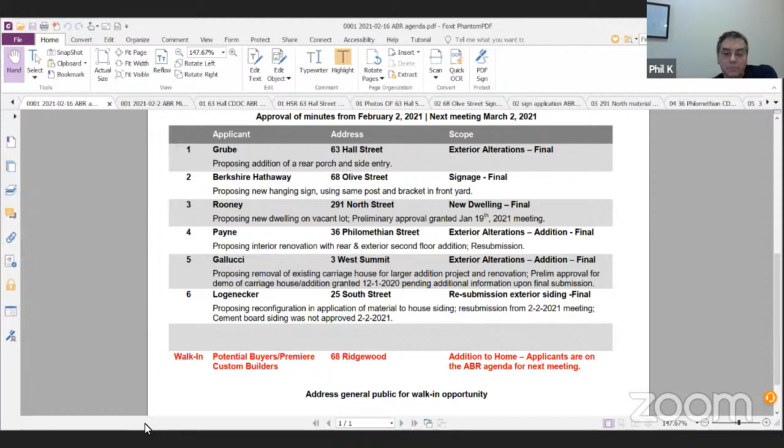No, no. Time-wise, are we good? We good. I declare this meeting... you're ready. Are we ready?

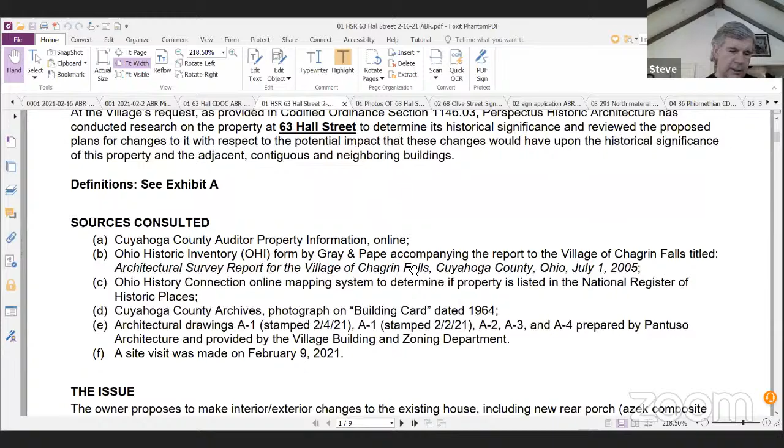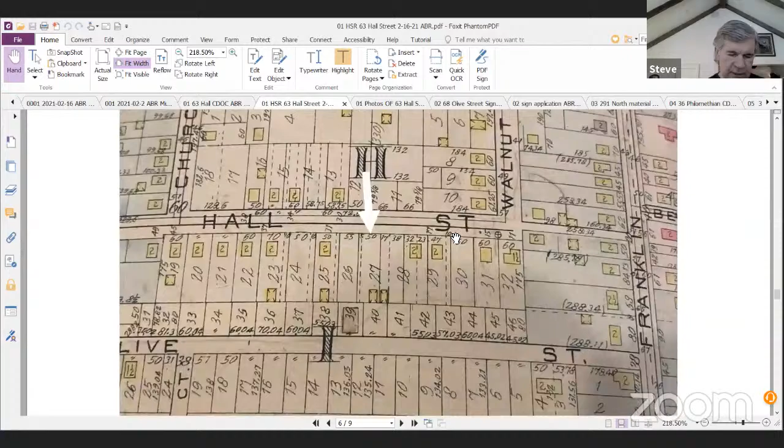I'm a little puzzled by their finding of it not being historically significant, because it's pretty much intact and it's a cute house for its time, but does not meet certain national guidelines evidently, and so it was deemed by Perspectus to not be historically significant.

So I fall with you that I do think this house is historically significant. It's 99 years old. I just think it's really strange to have these called non-historic based on a technicality. I think there could be a little discussion had about houses between 50 and 100 years old and how they fall into this -- especially if they're relatively unscathed in terms of additions over the years.

Anyways, nonetheless, we will accept their thoughts. I move to receive the report. Second. Sorry, Wendy, you got beat on that. No, that's okay. So motion by King, seconded by Childs. Naylor, yes. King, yes. Childs, yes. Okay, motion's approved for the HSR.

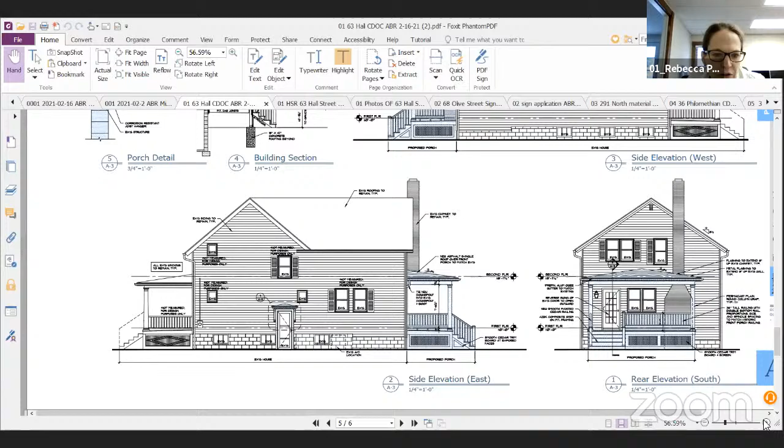I would agree with the board, it is a lovely historic home and should be on the registry. We're in fact trying to all but replicate the front porch to match in the back, doing a somewhat modest covered area. They've got a big -- if you look at the photos of the existing -- a poorly constructed deck.

The risers come up taller than the treads, so it's leaking water down in between and it's kind of a mess. We're going to tear all that out, which is great. In adding this back porch, not only will they have a little covered area, but I think it'll provide relief -- as soon as you walk in that door, you've got a mud room that's just the corner of the rear living room.

So not throwing Aaron, Curtis, and the 3 kids in the door out of the rain might be a little bit helpful functionally in daily life. But yeah, our presentation is such that we really want to match that front porch, so if you like that, you'll like this.

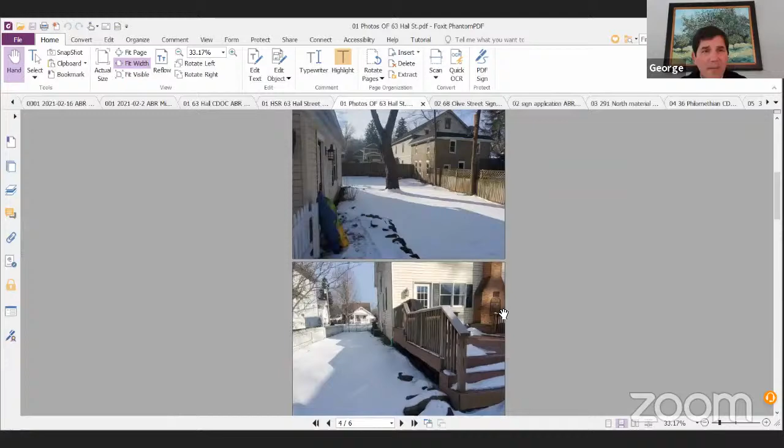I think there's nothing at all objectionable about that -- the rear porch concept, I'm all for it. I just had a couple of comments. This distance from here to here is over 18 feet, and really the study of intercolumnation -- if you look at the front porch, the columns are probably within 6 to 7 feet. There really should be some sort of column either here or here, because this looks like the span is too far and needs some other type of column.

Again, that's basic intercolumnation of spacing a column. So that would be -- I think the porch is fine the way it's laid out, the hip roof and everything, but I would highly recommend a column in some area. The other thing I think is on the hood, if you go to that hood detail.

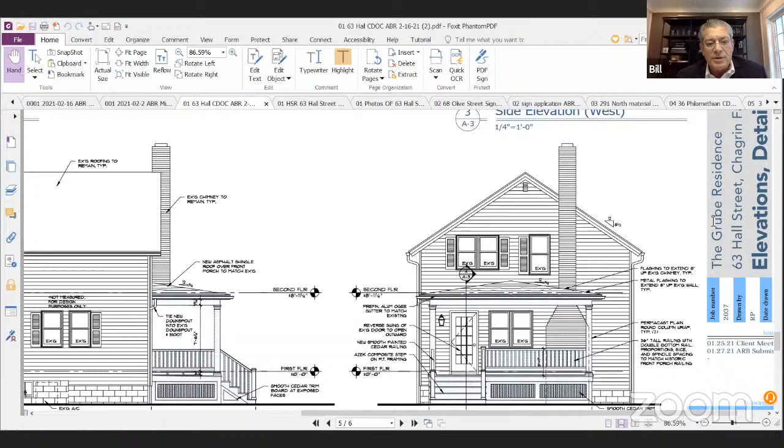Stop -- how about the side entrance, Bill? No, go back up, sorry. Well, you missed it, a little bit farther down. So I think this hood's nice and everything, but the bracket really needs to come out to here -- it really should be here. So it looks like when the beam goes around and returns, it has to hold up the corner instead of being cantilevered.

But those are the only comments. Other than that, I think it's fine.

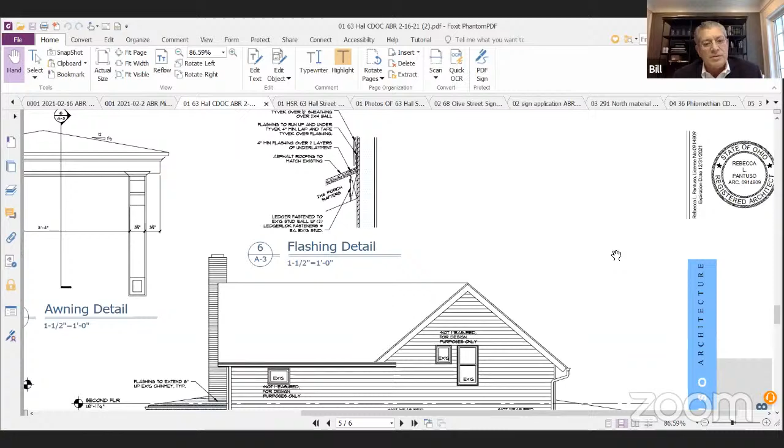Thank you. Anybody else? Does that arrangement match the front? The cantilever idea? No, it's going to cantilever out past the bracket, and I'm trying to keep that kind of modest in detail, because it's going to overhang the bracket in the front.

I've seen a lot of little bracketed, very small things that do not have the beam element. You're really bracketing to the under surface of that, and I think that's what this is. So then a projection on the side might be appropriate, Bill, if it's that modest little overhang without the beam, and you're really just holding up this little roof with the brackets. Yeah, I agree.

Motion? I move to approve plans as presented with the addition of additional columns and attention. I think if you're going to add a column, I like the idea of accentuating the entrance with one column added instead of two, but I think we should leave it up to Becky and her client to figure that out. We've got a great porch, it's a nice solution.

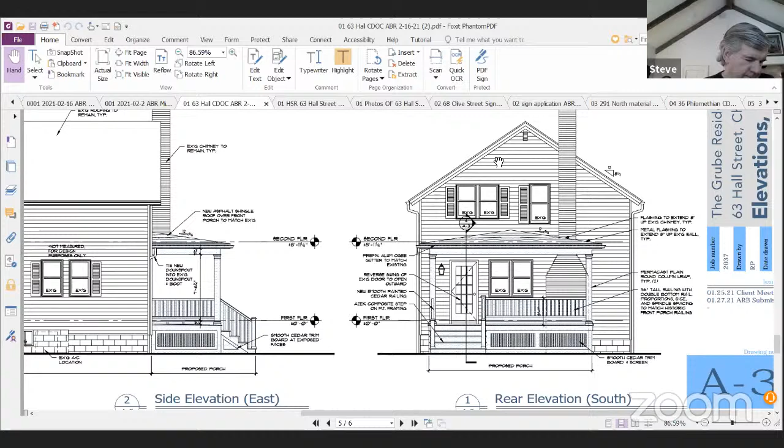68 Olive Street, Berkshire Hathaway, hanging sign. I think we could probably move to approve this. Yeah, this is basically just a rebranding of what was there. Okay.

I agree. Motion to approve as presented. Second it. Okay, moved by King, seconded by Childs. King, yes. Naylor, yes. Childs, yes. Okay, that was easy.

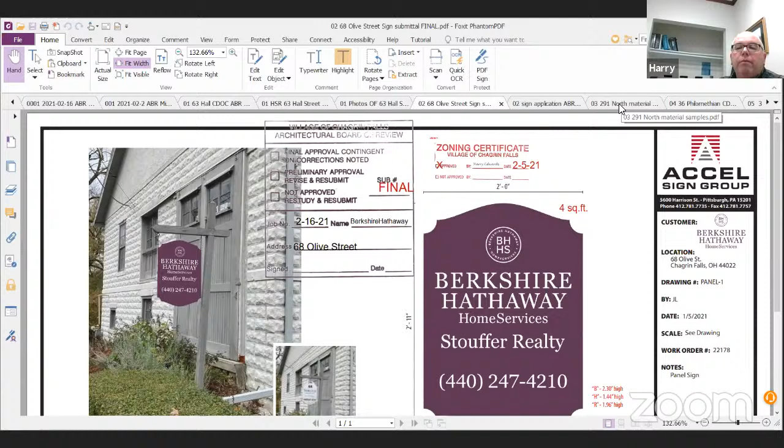Moving on to 291 North Street. Maybe.

I might have lost the file, I've got so many tabs here. Oh, there it is, I see it. Oh no, that's the material— that's the materials. Yeah, I'll have to go back in and get it. Please hold.

You see that? Oh, nope, nope. To you. Yeah, thanks. Now we see Bill. Morning. Hold on a second. Morning. Hey, Christy, I might need your help here for a second. On my way, thanks.

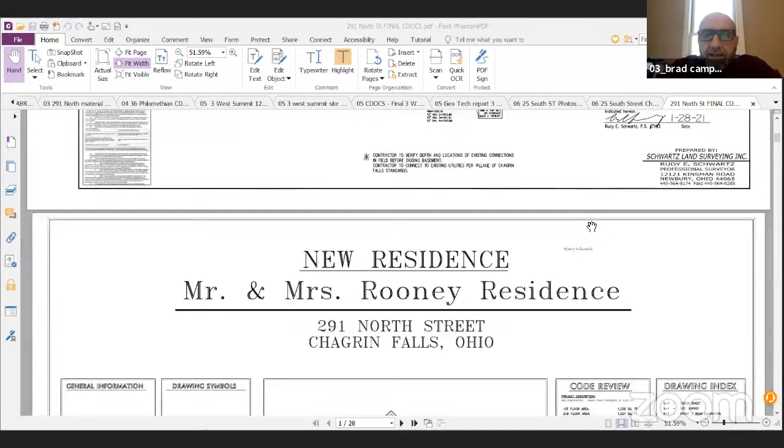You guys, excuse me, you guys see that now? Yes, thank you. Okay, sorry about that. Thanks, Christy. So I don't know, Kevin wasn't feeling all that well yesterday, so I'm assuming he won't be joining us this morning.

We switched to the Hardie board per the board's request. We're going to use the Hardie board with the MiraTEC trim. If you go back to the front elevation for a second, the one thing we're hoping to put back in is we really like that arch. I'm just going over the things you asked us to change since our last meeting. We really like that arch transom over the front entry and that little ski slope arched roof on the right-hand side. Those are two things we are hoping you guys would accept.

Sorry, go ahead. I think those two elements do complement each other formally. I mean, they give a little softness to it.

I'm not positive about correctness, but I don't know that this is a completely correct design in any event. It seems like how you've handled the roof, and I agree - I love the sloped roof. I was sad to see it go, and I'm glad to see it back, because I really think it adds some softness, like George said.

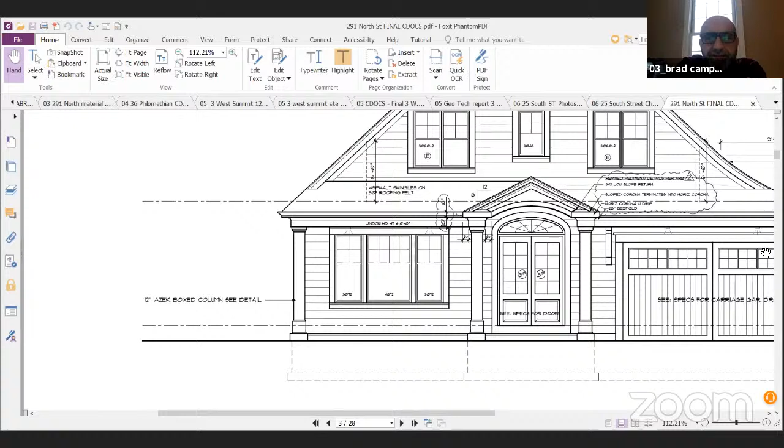On the left side elevation, you had asked us to either pull the foundation out or pull it in. Oh, I'm sorry, let me see if I can pin Phil here. Harry, could we zoom out again? I do think one nice thing about this front is that you've got the overhang of that little porch on the left side to create shadow.

Where do you want me to go? The left side elevation?

We had a dog shed, direct vent fireplace, and the board recommended either pulling that fireplace into the great room or pulling it out. In order to afford the Hardie board siding and stuff, we opted to pull it in so we didn't incur the additional foundation and stone cost. I think that's fine.

Brad, not to interrupt, but on page 167 is your exact porch except with the elliptical. Look at the left side of that page, it'll show you how to do that. 167, okay perfect, thanks for that. Those details are the best because they don't cost any more money or any less, and they just make everything better, you know? Right, correct.

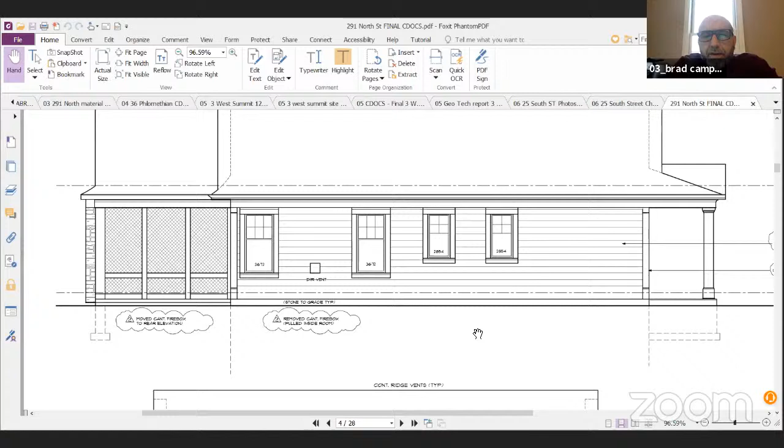Now Brad, I did get comments back from our plan reviewer. You're gonna have to resubmit new plans to me. Also, I think you were copied on the site plan - our engineer needs you doing a revise and resubmit. Yeah, that wasn't approved yet. We'll make those corrections.

Sounds good. I was thinking we could buy Harry a copy of that book - I got one on my shelf back here - and save $45 twice a month.

You don't need to buy me one, it's right here. I have one too. I do too, and I use it all the time. It's funny, I do too, when you're trying to explain things. It's very helpful.

Are we ready for a motion, Steve, for final? Yes. Okay, motion for final approval with attention to porch column, capital, and architrave, and entry arch, following pages 157 and 167 of Get Your House Right book for guidance.

Did you get that, Joan? Yes, okay.

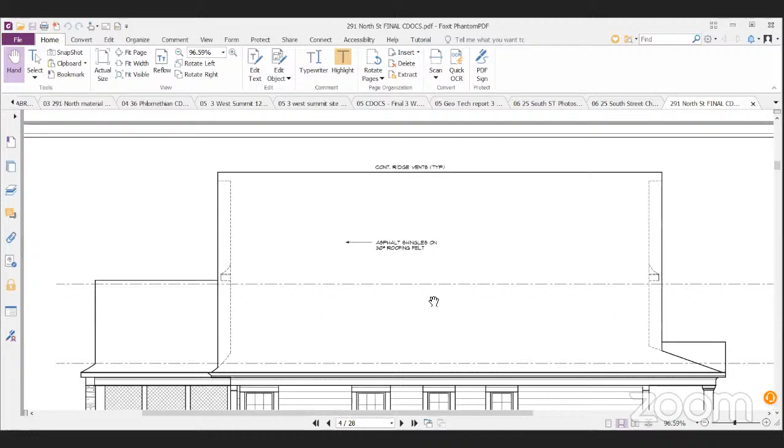Just one more comment - if when you're doing this, just so we understand it, you also see that happen on the right and left side elevations where the front porch architrave comes around.

Brad? Yeah, I was actually going to change the plans, and I would really appreciate the approval obviously, but I was just going to resubmit the detail just to make sure we get it right, frankly. I'll have Kevin make the changes, and maybe I could just take like 30 seconds of the board's time at the next meeting just to be like, yeah, you got it, Brad.

Great, yep, we're happy to do that. Yeah, I just want to make sure I can look at these pages, have Kevin make the changes, but it takes 30 seconds to make sure we get this thing as proper as we can.

I think you've done a great job. I feel like there will be a future addition that will improve this house, which will be a shed dormer on like a third or two-thirds of the side elevation - something to pop out there. I don't think we can force that.

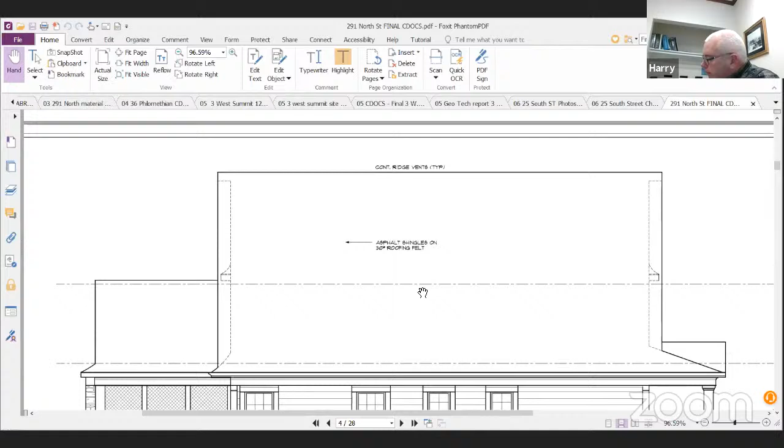Okay, we got a motion, need a second. Second. Motion by Naylor, seconded by King, for final approval pending grade plan review and plan review. Naylor, yes. Childs, yes. King, yes.

Christy, my wife just got a phone call - somebody's trying to get on the meeting. There's nothing special, how do you watch the meeting? You just dial in. Sure.

Can I ask one more question? I just want to have you guys look at that front elevation - should I fill out a whole other application, or just at the end when you have the public hearing, just show you the detail I did? That would be fine.

Right Harry? Yeah, that's okay. He's just gonna come back and show you what he did. Okay, pretty informal.

All right, I got 5 kids at home, so I remember when snow days were fun. Now I wish.

Have fun, Brad. Bye. Thank you, bye. Go sledding.

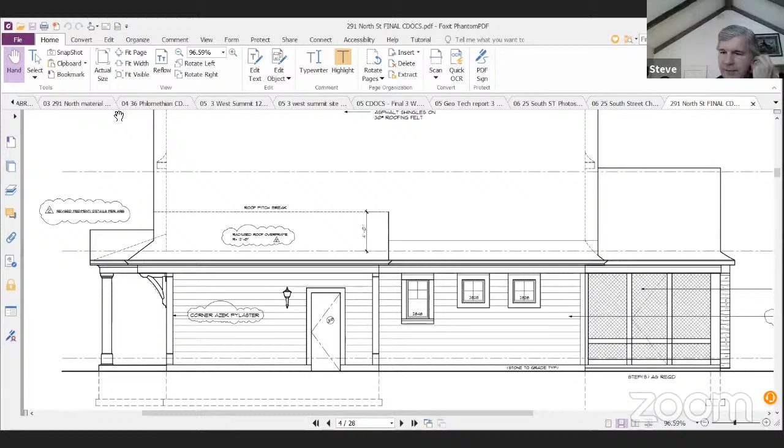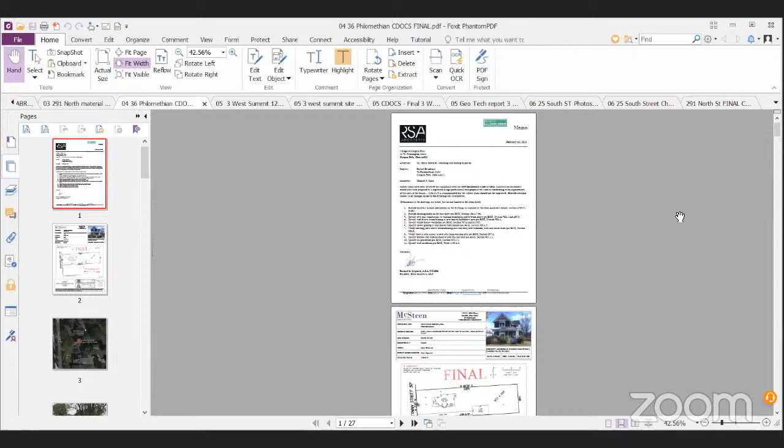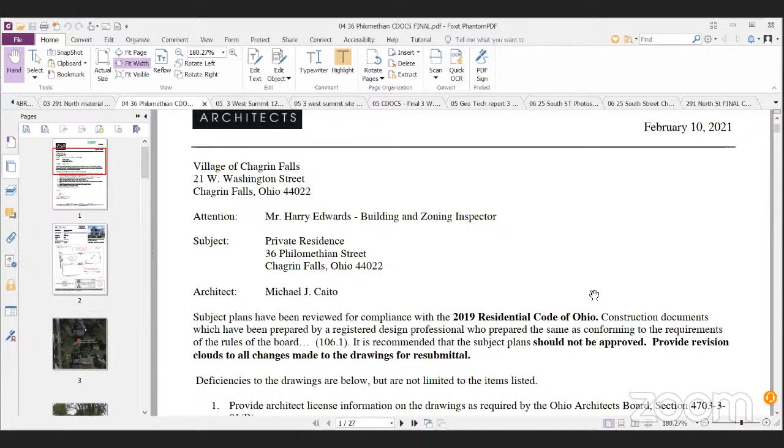How does somebody get on the meeting to watch it? If an attendee would like to join, they should go to chagrin-falls.org and go to the virtual meetings page, where there's a link to join. When they select that link, they'll be prompted for the password listed on the website, which is 44022. I will see them as an attendee in the Zoom platform. So, go to the website, go to the virtual meetings page, and click the link for this meeting. Three steps.

Okay, 36 Philomethian, an old friend.

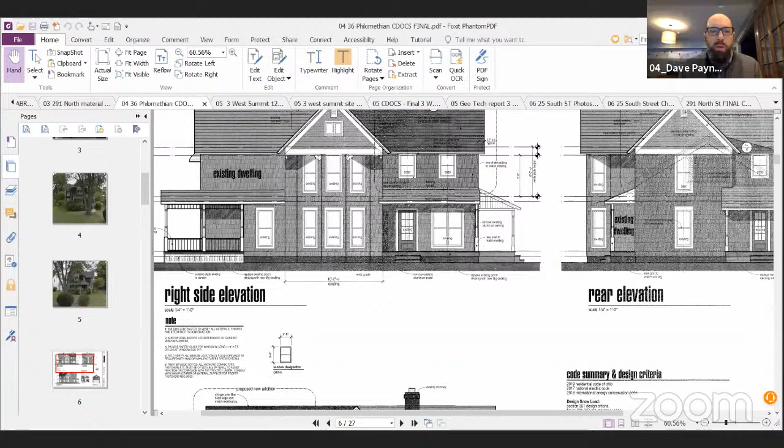So thanks for having me back this morning. This is our final submission for 36 Philomethian. Previously we submitted for preliminary. In that prior preliminary submission, we showed the new rear elevation concept reflecting the reverse gable and the asymmetry. Some notes from that submission were to lower the pitch of the roof slope of the hip element on the right side of the rear elevation, and to add a window above the door on the rear elevation. We did that, and then we were asked to study further, and we actually presented two different looks.

So not to confuse you, but you have multiple choice this morning. We wanted to study how this looked on the left side elevation, and it was requested that we draw the left side elevation in full. So we drew it two ways. One is essentially that this addition is flush with the existing side of the elevation. The other way we drew it, if you could scroll down, was with a step in the left side. Let's see, where'd that go? There it is — this is the alternate that was drawn.

We were asked to study working off of the rear porch roof and integrating the detail into that to provide some sort of visual break, stepping it to create the L shape of the left side elevation. Lastly, we're adding a new garage door to the barn. The barn door in the rendering reflects the selection we've made, and we are no longer centering the hayloft doors above.

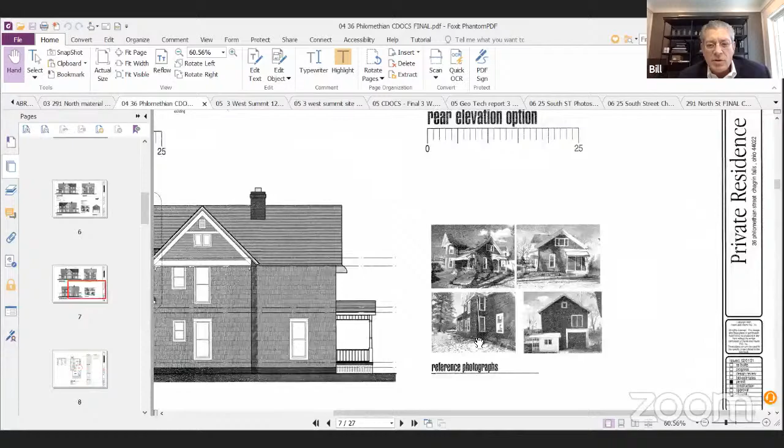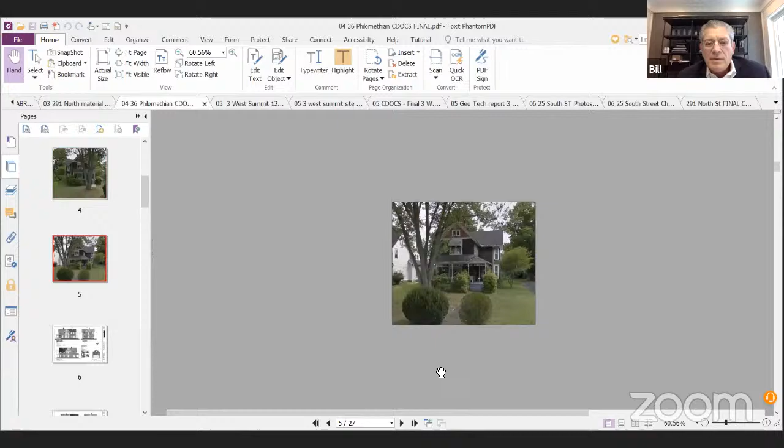So could we see the rear elevation of the other solution? Like, that was this one, correct? And then you have the flush solution. Go back up, Gary. There you go. Is there a rear elevation of the other solution? Yes, it's on the same page for each one of them. Shrink it down a little bit. Option, and then the—

So I would maybe defer to you guys on this, because I'm starting to feel like you're right about that side elevation. I know I was pushing for the step in.

I'm a little troubled by this super low hip roof there — it seems anomalous. In some weird way, I think they'd get more headroom if it was a sideways-facing shed that went up closer to the ridge. I don't think there's a lot of headroom in those rooms, and matching the eave actually seems a little forced to me. I feel like we've tried to push it down and make it so inconspicuous that it may look a little unnatural once built. I could go either way on the shed versus hip.

You're talking about the little shed over the master bath and closet. Yeah, that's the one. That's the trickiest part of this thing.

Can I see the rear elevation again with the flush alternative? Move it over a little bit. So it's up. Yeah, that's the inset one.

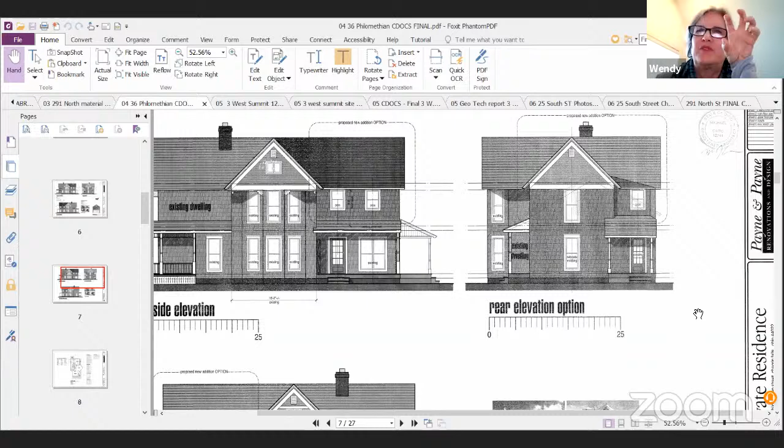So I was thinking, well, maybe I guess you could do it. You could make it kind of an L. I see what you're talking about. It's this little kind of thing stuck in the corner that isn't a shape that goes with the Queen Anne.

If it was just a shed at a different roof pitch that's set back, so it's just a wedge tapering up to nothing up there, but showing siding and a rake to the rear up to this rear elevation, I think that might be more natural.

You mean take the hip up higher into the gable? No, even get rid of the hip. Turn it into a shed roof from there. I'm curious Mike, what do you think about this?

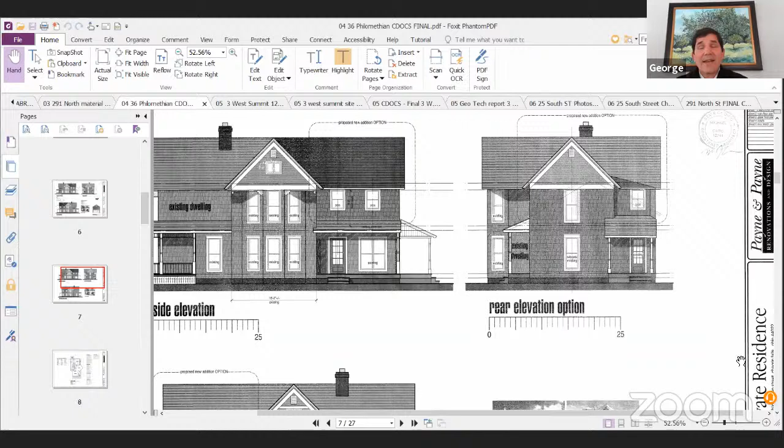I was thinking maybe just what we're seeing here, just make it a shed, but make it a little bit higher. Right now it looks so low and it gives you no headroom. And you've already pushed the wall back on the rear elevation.

So you can extend that. I would personally narrow down the shed's eave coming out to the rear. It doesn't have to be 12 inches all the way around. Like the porch below it, where the shed is coming in and only projecting out a couple of inches.

Do the same thing. It's really simple. We've been pushing and pulling, and I'm looking at the dotted line on the rear elevation of page 7.

We're trying to enforce Queen Anne rules when they didn't enforce their own rules back then. These were houses that were basically packages, and they didn't come with a rear addition that was 2 stories and a cruciform plan and all this stuff. We're really pushing stuff around that just didn't happen, and we're making too much out of nothing. So I think we need to let these people get their work done.

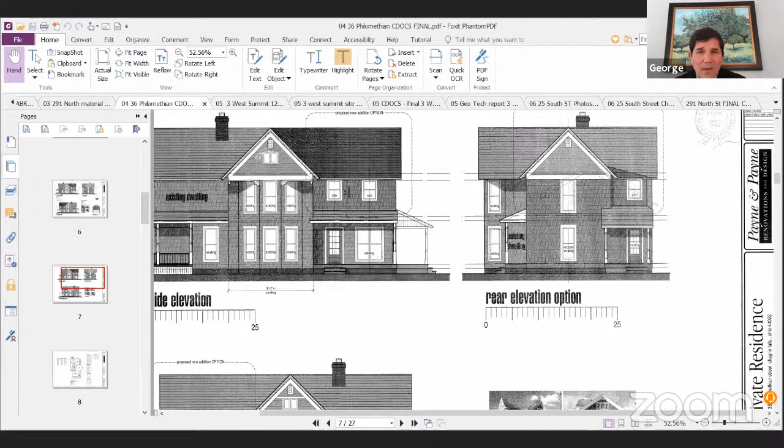Maybe we can just let them sort that roof out whichever way they want, but it needs to be flush. You need the space on the side. It's in a very inconspicuous corner. Of course, we're looking at this in plan, but it's not like this is on the front of the house, but I think if you work that roofline a little bit, it'll improve the design.

But I defer to you to do it. Makes sense. So the feedback so far we've heard, Cato, is a little bit steeper roof pitch than what we have shown, a little bit lesser overhang on the rake, and the study doing a shed element in lieu of the hip element. But it sounds like we're given some license to do that within the guardrails of what's been discussed here.

Yes, I just have one comment. Getting back to what Phil said, a lot of these houses weren't designed by architects and they were thrown together, but we now have the opportunity as architects, and we've all gone to school. I went to school for 8 years with a master's and certificate from Institute, that this is the opportunity for us to get the proportions correct, get the details, and give the village that vibrance of good historic classical architecture.

So I think it's our duty and our objective to try to get these houses cleaned up and be as architecturally correct as possible within reasonable limits. We don't have to be perfectly classically correct, but at least get the proportions and the basic scale and harmony of the composition correct. So I do think that's our job and what we should be doing.

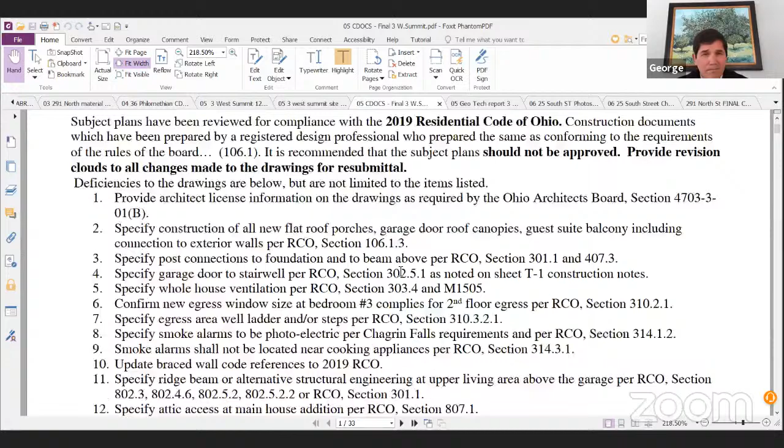Again, you guys have seen this a few times as well. So we made some of the modifications. I believe Dave's on the line, and Frank Galucci, the owner, is also on the line.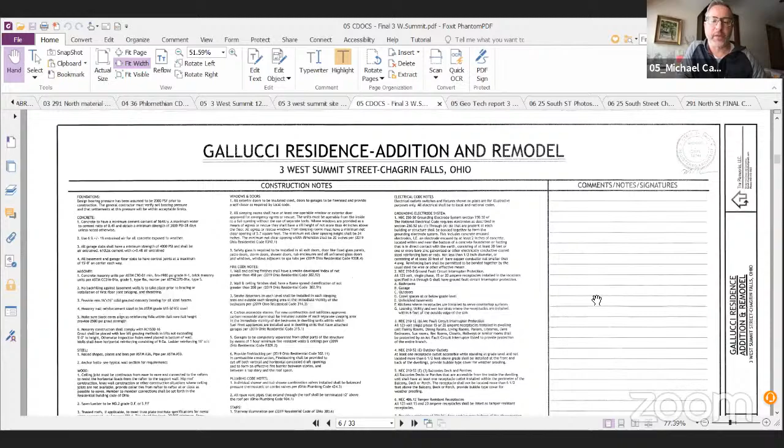If you go down to the elevations, I think we submitted like a huge email. Let's go to where the main comments were, really on the front that faces Summit. I think it's the next sheet down. Right here, so if you look at...

The comments were all around the addition. Point number one, the comment from last meeting was the side lights should be 3/4 glass, and before we had the glass going all the way down to the sill. So we've raised those glass panels up to align with the panel that's on the door.

The second comment was lowering - the owner still wanted to have those columns in the front on that portico for that new entry, because that will be the new front door. We did lower that roof down - before, that flat roof was touching the cornice of that breezeway roof. We call it a breezeway.

So we lowered that down so it's not as tall, and the old door, which is on the left of this elevation, is taller and higher. The third comment was the 2 little square windows on the first floor of the carriage house needed to scoot in to be a quarter of the way in on either side from the corners.

When we looked at it, they started running too close into the stairs. So what we ended up doing is we moved them in sort of halfway from what we had before, and we centered the windows between the corner trim and the bigger window that's on the second floor. So those 2 squares are centered between the corner and that taller second floor window.

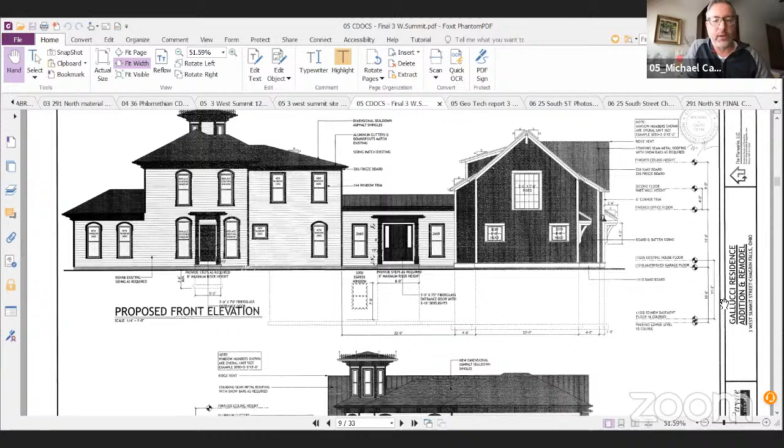Another thing I wanted to show you guys too, if you scroll down a little bit further - we had a couple of hidden elevations that were not presented last time. So this is again the side of the carriage house that faces the old house. So you could see sort of the French doors.

You could see we're having like a folding wall. There's a downstairs entertaining kitchen with a sort of a folding window that's on that lower left there. You can see a cross section through our breezeway.

And if you scroll down a little bit further, again, this is the hidden elevation - sorry, if you go up right there. So this is the hidden elevation of the old house. Again, you can see the breezeway coming through in cross section. You can see our built-in grill and our sort of stone retaining wall.

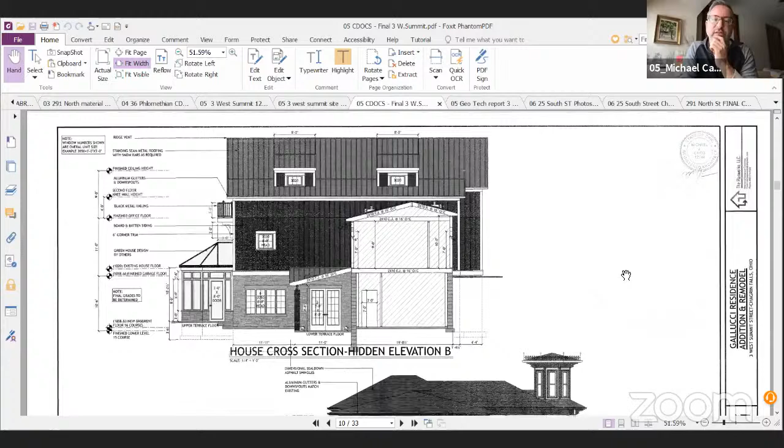And if you go up, actually go to the first sheets in this elevation, you can see the rear. Go one more up. Yeah, so this was the rear. Again, this faces towards the village.

We do have an elevation where we actually drew the grade line straight across because you're not going to see that lower level at all - the grade slopes up back towards the village and then drops back down. So there's like a plateau. So somewhere in this, there's that elevation that shows what you really would see if you're standing 100 feet back.

I don't know if it's like further down. I can't tell. Yeah, I think it's down at the bottom. It might be down at the bottom. Yeah, we kind of stuck it in there as an extra drawing. Maybe keep scrolling down, Harry.

Sorry about that - what about the stone wall material and treatment? What is the stone and mortar treatment? We have a picture of that as well - we have a picture of all the exterior materials.

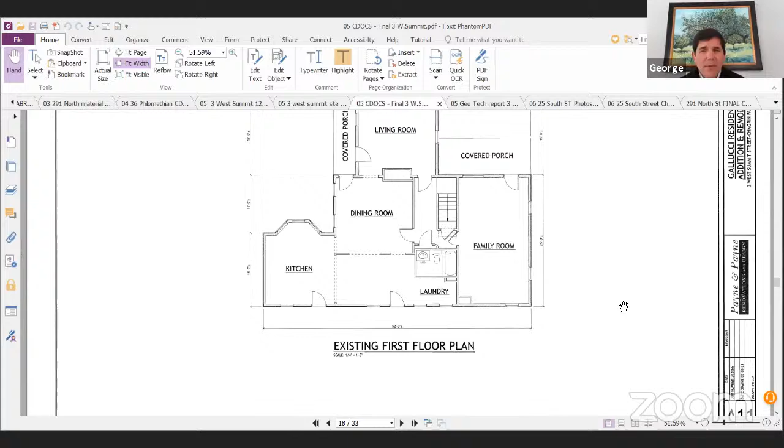Should be coming up. Do you have a model of this project? We do not have a model of this project. The grade - it is page 23 of the PDF, if that's what you're looking for.

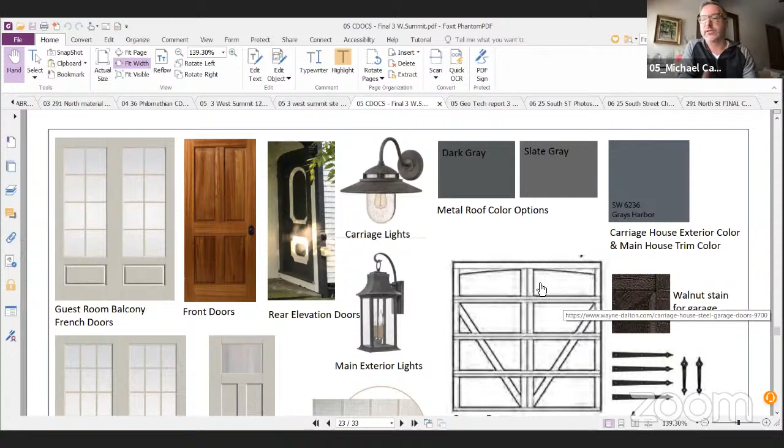Yeah, here, these are our exterior colors. So the exterior colors were kind of mimicking what's already there. So it's like the charcoal gray is the trim that's on the house currently, and that becomes the body of the board and batten siding on the carriage house. But if on this sheet, if you just scroll up just a little bit - at the bottom, no, right there - there's the exposed stone.

So we're using that stone, which is kind of like a gray looking stacked stone. That's going to be the stone at the base of the carriage house, as well as for the retaining walls along the driveway and any retaining walls around the grill area and the stairs in that lowered courtyard.

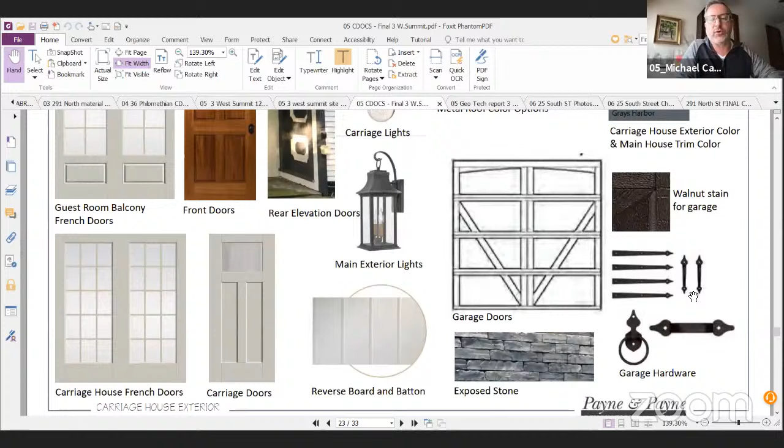No, that stone is just stacked. Are you having mortar, or you must be? Yeah, on the house it'll be mortared in. But for the retaining wall, it's designed as a stacked retaining wall.

I actually have a website, but I can't share it. Is it veneer, like you're doing? It's like 4 or 5 inches deep, sort of rectangular chunks of stone. It is real stone.

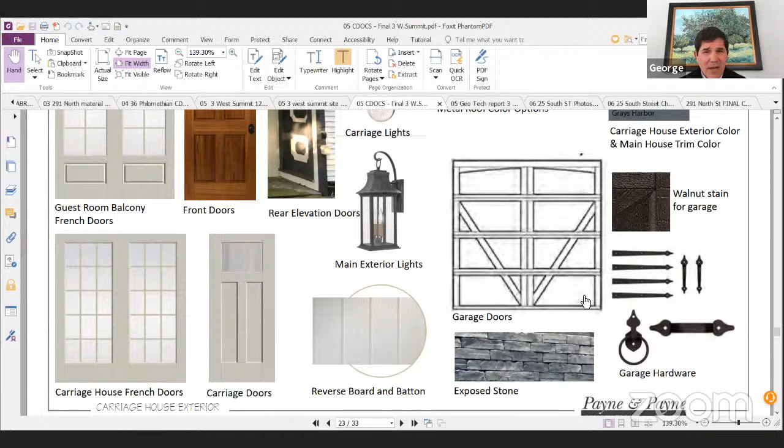I have to say, it's good that it's real stone, but that does not strike me as a historically compatible look, especially for the foundations. There's something too linear about the dry-laid look that isn't right. Too uniform, and even the gray, that kind of uniform gray doesn't feel like it blends too well. So I think that was a good question, Steve. I agree with that comment.

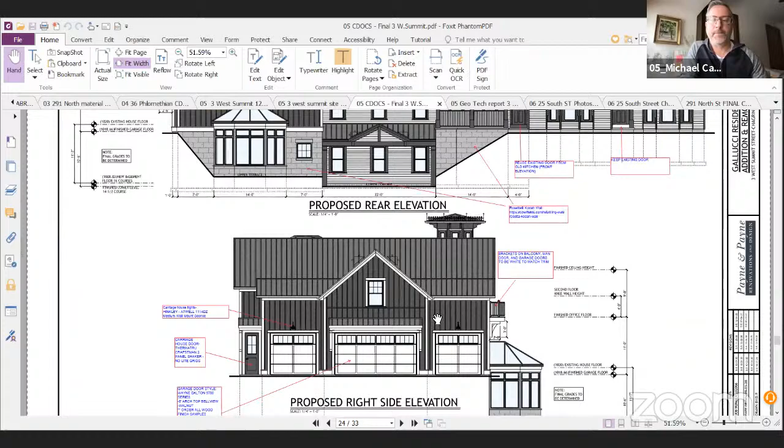Could we go to the plan? I know there's a lot of stuff to talk about. Do you want me to go down to page 30? Do you want to see the grade? Yeah, let's look at the grade. Oh, the site plan, sorry, I was trying to skip over to your question, didn't get it.

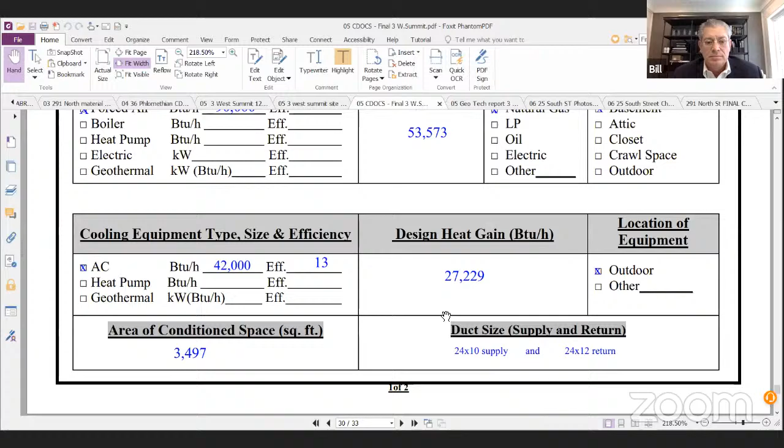Well, it's not on page 30. That's it right there, yeah, that's the elevation I was talking about earlier. If you're standing like 50 or 60 feet back in the backyard, that's what you kind of see, because the grade slopes down. It will slope down, which you'll see on the topo, into the lower courtyard. You take one more step backwards, then you start going back down the hill towards the new little park we're creating.

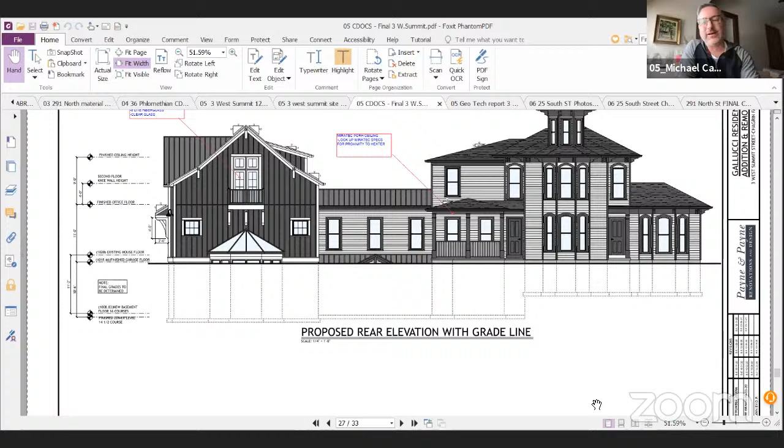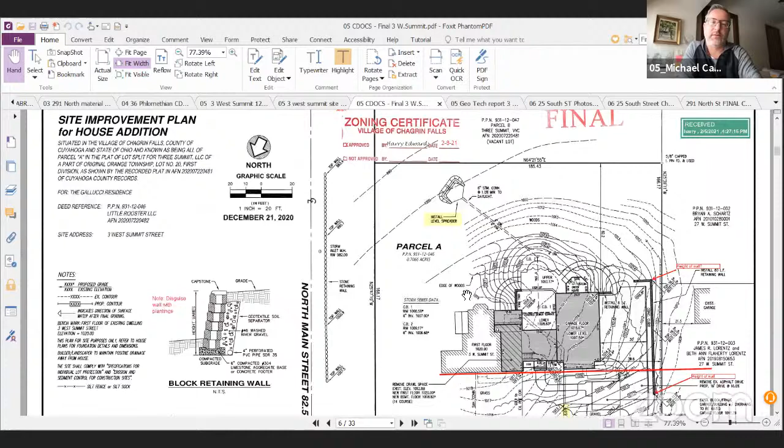So I think the site plan is further up. You're going the right way. There you go, there's the site plan. Maybe you could blow it up, enlarge that part right there. Thank you, Harry.

So we've got this retaining wall, like we talked about, that wraps along the driveway there. And we're going to be planting bushes and ivy to kind of soften it, so it just disappears into the landscape.

How high is that wall going to be? Dave, do you remember what this ended up being? Is it like 3 feet tall? Looks like it's 3.5 feet. If you zoom in, you can see the elevations marked on there, it gives the top and bottom.

Dave Manhart, yes. And we have so much historic wall on the property that was split off. I just wonder if we can use that as a guide for construction of the retaining walls, match the stone that's already out there.

George, what are you talking about? The wall, the Grove Hill wall? Yeah. I went up and walked around, trying to see in my head, I believe this was either a field stone. Isn't it like a sandstone fieldstone color foundation up here? Yeah, it is, it's like a sandstone, and in some areas there's brick that could blend with it. So more of a fieldstone color.

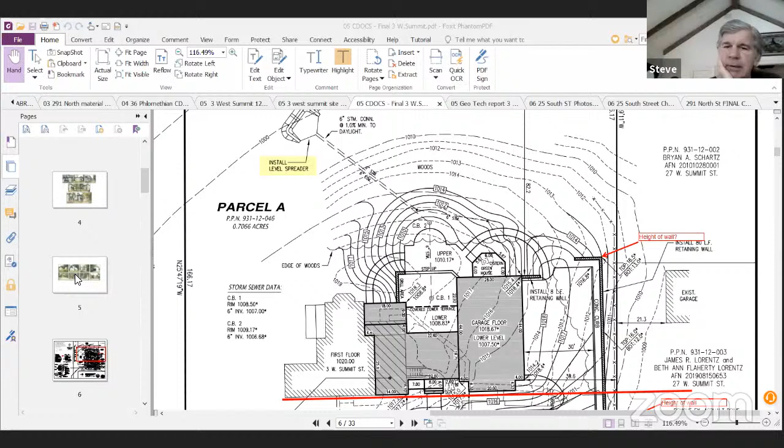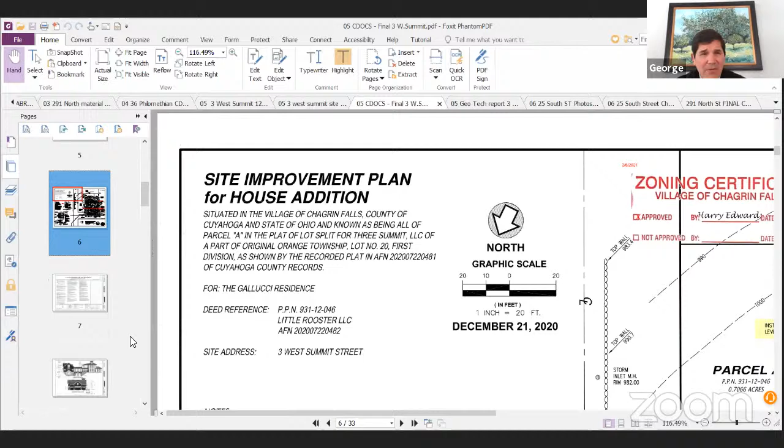What about the idea of a true stone wall, an irregular stone wall, because those are essentially stone bricks, so you don't have linear lines. I mean, it's a stone wall, like matching the existing stone walls. I think that'll be a good thing about seeing something on site, that you can walk around and compare it visually to what's there.

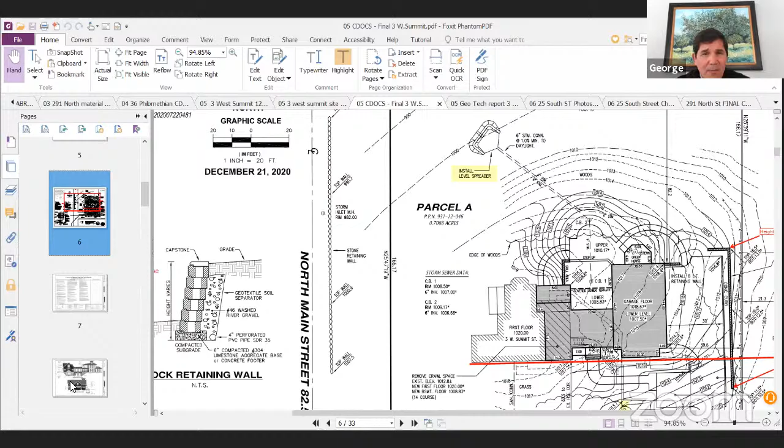So going back to the elevations, one comment I had—I know I probably skipped out on a meeting or two—was trying to make that... that was perfect, hang on, that's exactly what I'm thinking about. I was trying to make the barn structure narrower, and I see that you've kind of kept the width of it.

Or, well, we made it narrower a couple years ago, it got smaller. It is narrower. And then I do see that you projected a narrower form towards Summit Street, which I appreciate. I think that's definitely successful.

I'm trying to figure out this—my biggest trouble with this. I think what you're doing with the house, and a lot of the things you're doing, are very successful and nice, so I don't want that to be lost. That was my biggest concern with this, but I do think this is working okay.

I guess you did squeeze it a little, but you also dropped it, and broke and lowered that roof line. I think this works. I'm troubled by the windows on the barn, and I know they don't need to match the house.

Although you do see Italianate barns in town, there's something about them that seems either slightly overscale. There's a big picture window I don't like facing Summit, your central window, and some of your square ones seem big.

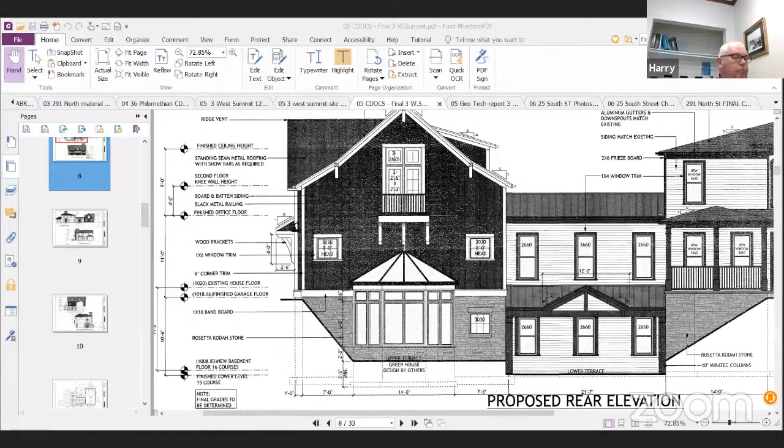Okay, copy that. Going back to what I think that connector roof, one possible way to treat that might be to make it a taller roof in general. That is not the roof of the whole connector, but just the porch. Make it a higher porch roof and flat would be a way to get your gaze up and out.

I would say a couple more columns or something that would look right on that. But then I think those windows, if they were a little, maybe not completely square, maybe slightly to the vertical, the square ones, and slightly smaller, could be very helpful. And I think the way you've broken down doors and transoms on this elevation could be your pattern for how to treat the elevation facing Summit Street.

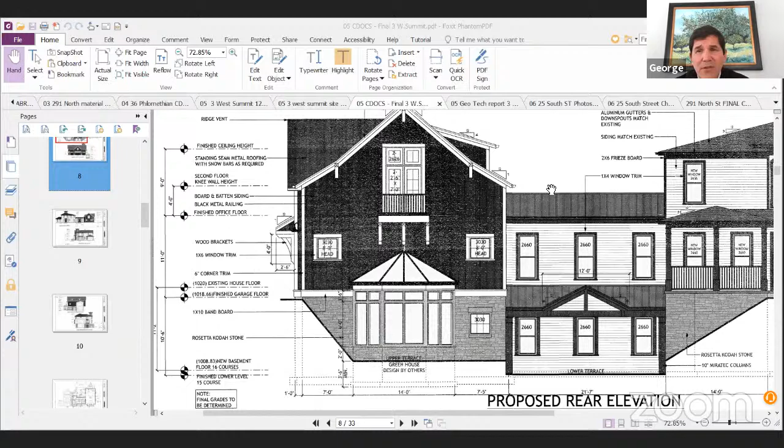So that big central window of the barn, if it's... could you scroll up, Carrie, to bring the Summit Street elevation out? I'm talking about something we're not looking at. I know what you're saying, but just pull it up right here. Pan over to the right, to the barn end, garage end, that one.

So adding, like, making that a transom, so breaking up the scale of that, and too wide, too high, two windows high, but yeah, tall windows under short windows. Just that, that seems jarring to me with the Italianate. And so that's really my comment. So think of those windows, get just tweaked and studied a little bit. I'd be really happy with this direction.

And I think the details are very important, as Bill said, but that's coming. I know it's a big process. What are these two doors on the Summit Street side?

The front door, there's a front door right here that you see, and then the door that's further off the screen to the left, that's an existing door that we're just leaving there. We're not using it because it goes into the kitchen. I see, but it's nice that you left it. We just left the doors because why not? This house has so many doors in it.

What's the door between the lights? What is that door? That's going to be the front door, that's that new part right there. So you mean the one right in the center of the screen, that will be the foyer? Yes, that'll be the actual door we use, in and out. It has columns, and it has a stoop that's covered. That's a covered stoop, it sticks out about 4 or 5 feet.

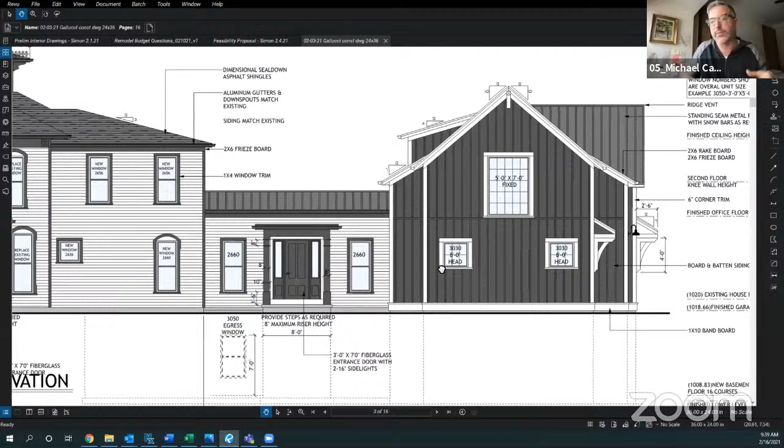I gotcha. Oh yeah, that's far easier to read. Thank you, Dave.

This is a raised panel wooden door, custom made I guess. Is this a Daniel Weaver door or somebody like that? It's a wood door, there's a picture - planning on Rogue Valley right now. Rogue Valley, that's a maker, Steve - a door manufacturer. I would consider doing custom because you may get better detail around your panels, which I believe is a feature of these made doors. That might be an interesting ride out to Daniel Weaver's workshop in Middlefield.

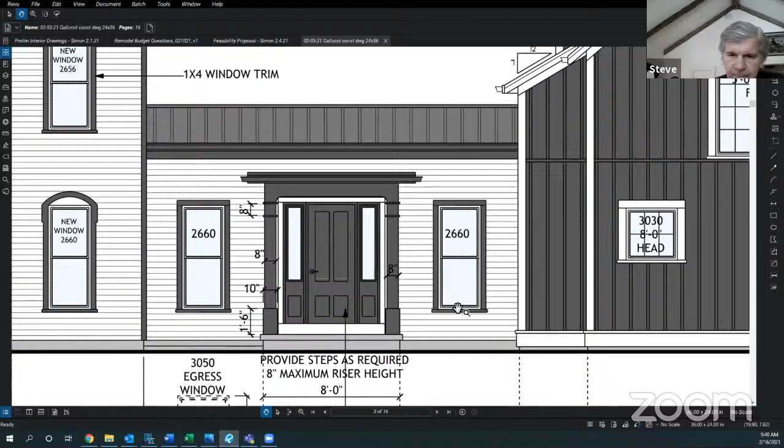This is a featured door and you would be impressed, I think. Thank you, that's way easier to read though. Thanks, that's very helpful, great.

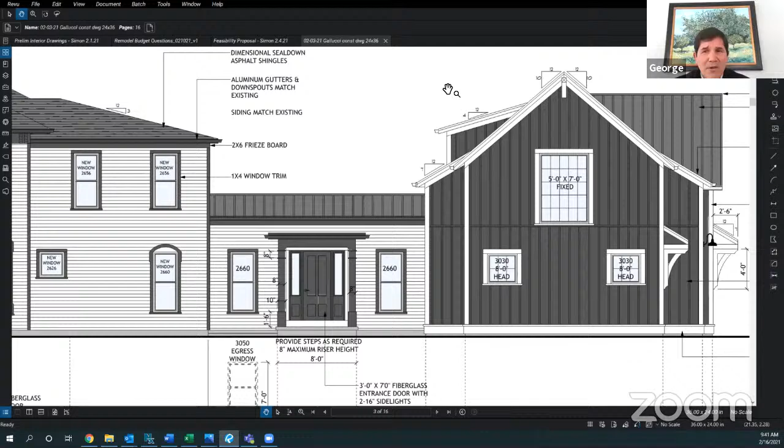I also noticed the shoulder that you had. I believe the shoulder is still flush, but you popped the roof on it, right, and kept that or added a window - is it attached to the original? Dave Manhart, if you could go to that rear elevation - I just wanted to recognize that the wall is still flush like the existing, and we still have that little roof the way it currently is. We just copied what's there, we maintained what was there.

So if you go down, the roof defines that - there, you could see it up there on the far, in the upper right. It creates the symmetry that I was looking for, yes, the balance. So I'm pleased with that solution - that's exactly how it is today. Thanks, sure.

Mike, maybe what you do on this - like George was commenting about these windows, just to keep the verticality in the Italianate, maybe all you have to do is get rid of these two windows right here and just keep these four, and you'll get more of the verticality. It's just a thought, you'd have to study that. So like two window panes wide, two over two, instead of three window panes wide, like the verticality, and just put the trim board right here. That'll look more in keeping with this, more of the Italianate feeling, instead of this going horizontally versus going this way. Yeah, especially with the wide trim.

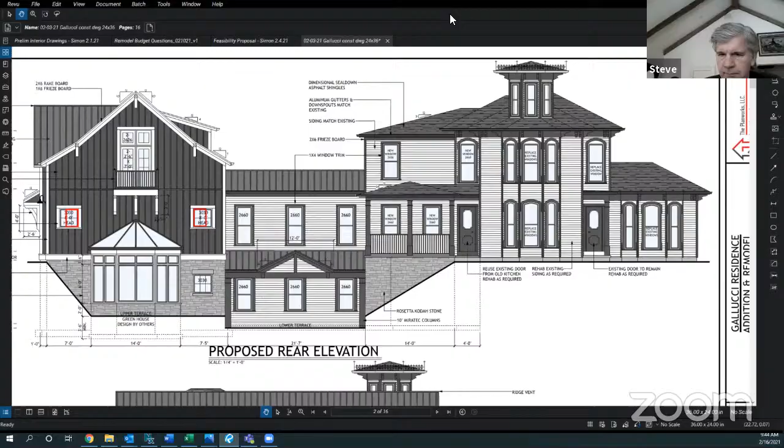Okay, well, in terms of moving forward, we've got a lot of things we've talked about that are yet to be seen. I think we're at a point, and I look for direction from all of you, where the plans are such that we need fine tuning, but we can approve them and move forward, and therefore approve the demolition.

So we're at the first would be, do we approve the demolition first or the plans first? I would go ahead and approve the plans as presented and then go to your demolition. Okay, we got a laundry list that tags along with that as presented.

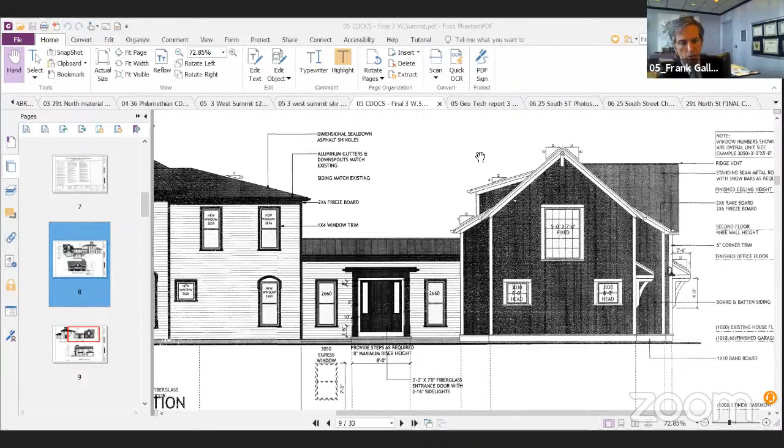I just have one thing for Frank and the architect. Have you guys spoken with Brian Schwartz and Jim Lorenz about your project? I spoke with Jim with regards to, he had two concerns he wanted to speak to me about previously. One was the type of stone we were going to be using along the retaining wall. We showed him what we showed you today. We'll obviously continue that conversation with him. I know there's going to be a photo texted to me, there's some other things you wanted us to take a look at. So keep him in the loop as far as that. He also had concern, I guess he currently has a significant amount of drainage off the property that goes toward his property, and we talked about how water is dealt with in this plan and showed him that was being done. Thank you, I appreciate you reaching out to those folks.

Very good. What was Jim's last name? Brian Schwartz is in attendance. Brian, if you could unmute. There you go. Thanks, yeah, I must have been booted out.

I'm sorry, I don't need to ask a question unless this is the end of this presentation. I thought we would be talking a little bit about the landscaping, the retaining wall, and whatnot. If not, I'll ask those questions. I was trying to echo what Steve said about how everybody's putting in so much time and capital into this project, and it's really appreciated by the neighbors and by the Save Grove Hill group as well. So I just wanted to make that clear.

So with that being said, is this the end of this presentation, or was the board planning to discuss the issues it raised last time with understanding the landscaping plan? I think the architect had said they were still grappling with the grading on the plan.

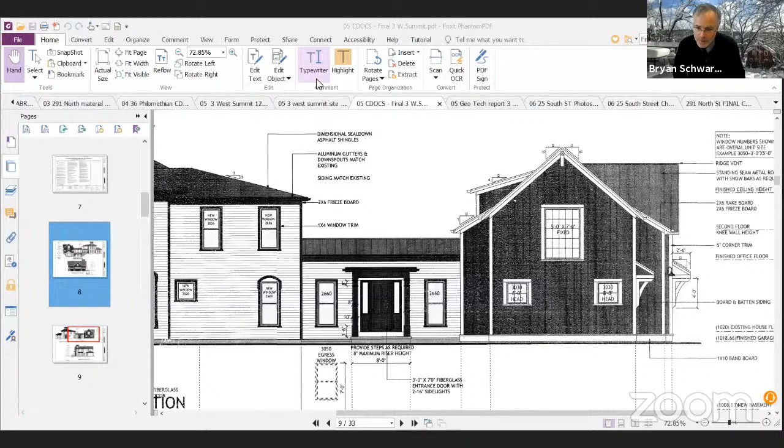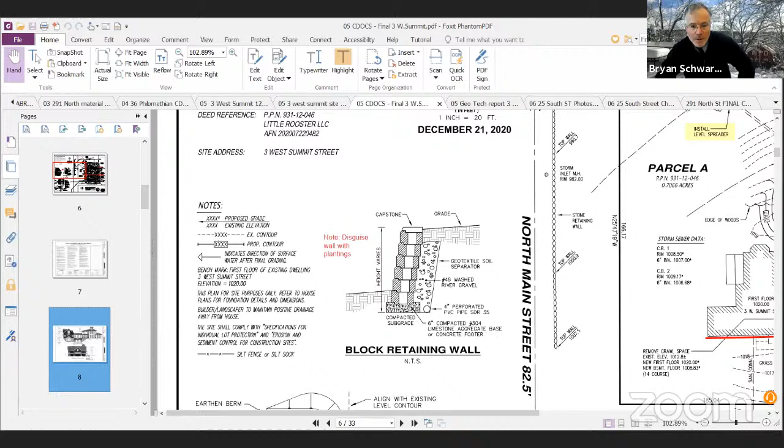Zoom in on that plan. So we're talking about this plan right here, Bryan. This is the one that's closest to you and Mr. Lorenz. Right, exactly. That's showing some sort of cutaway I'm not going to be able to understand. I thought maybe you could just explain in layman's terms what the purpose of it is and how it's going to be designed and who's designing it. And then let's pan over so we can see the plan of that retaining wall again.

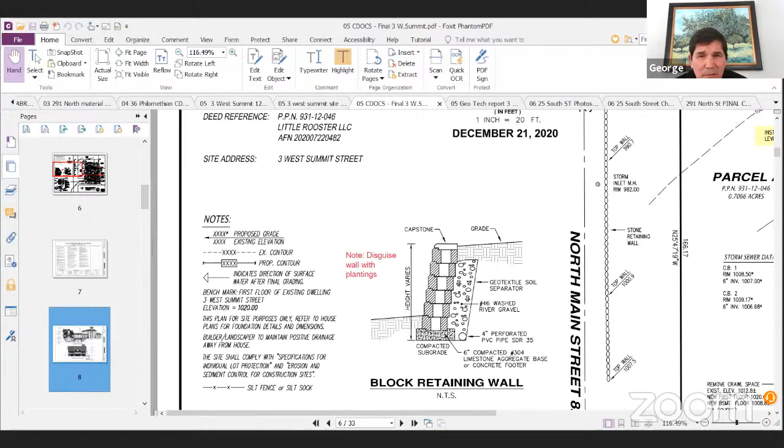So it's a retaining wall block system that we're working with our civil engineer to design. You can see a cross section through there. I think we did share an image of what that looks like. It's sort of a stacked stone, of which we were going to submit a sample to the board for further review.

Right, I saw that, so it looks like that. We don't have a landscape plan drawn yet, but there's going to be landscaping in front of that wall, as you can see here, that dark L-shaped piece. It's about 3.5 feet tall at its tallest point. There's plenty of room between the wall and the property line to install bushes and some softening to that wall with landscaping. I know Frank talked about maybe putting some ivy across it. We're still working through those details. The idea is that stone wall should just meld into the landscape and not be totally visible from your house.

I heard all that discussion. I was on for the whole meeting, so it just must have cut off right when I wanted to speak, of course.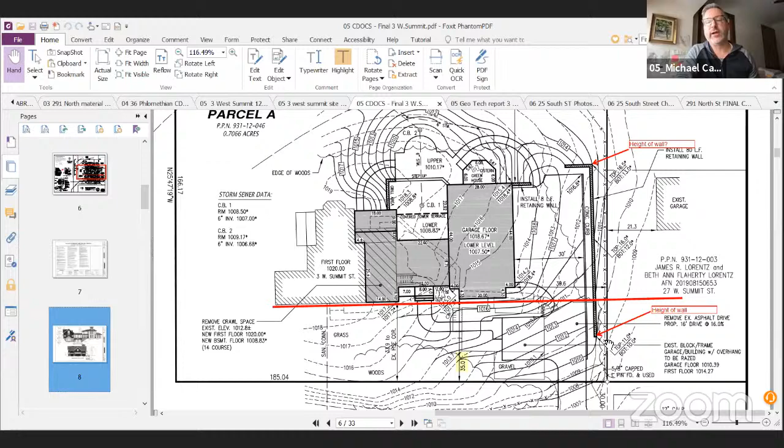But what about structurally? What does that wall retain, I guess? There's a difference in grade from the property line to where the driveway is. The driveway's uphill about 3 feet at its maximum point, so we have to retain the driveway so that we can pull straight into the garage and not have too much slope on that driveway.

So you said you're working with the civil engineer, but are you guys the architects designing the wall, Mike? I'm the architect, I work for the building company, and we have a civil engineer and a structural engineer all on the project. And Bryan, just for your information, the village engineer is reviewing everything here with this site, which is still under review.

Nothing's been approved yet. Right, gotcha. And by the way, if you want to look at another example of the stone that Steve and everyone was talking about, we have the old walls of the greenhouse that used to be on the property, which has that sandstone look you were talking about. Or the Mahaliks, the Graves house, has some of that kind of stone on it as well, and they did an addition. Their garage addition has some kind of sandstone look to the base of it. So if you're trying to mimic things, which it sounds like the board was maybe recommending, you can look at those.

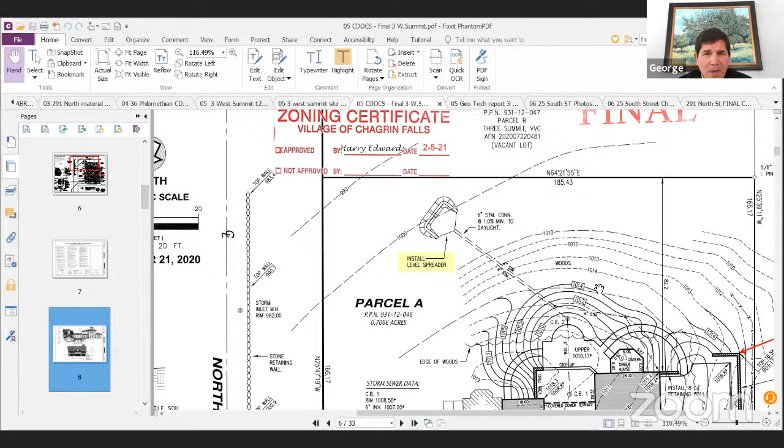It is a final, correct? Yes, it is. And as I mentioned earlier, the grading and hillside report is all under review with the village engineer. He has not approved anything yet, it's under his review. Along with the plan review, they have to do a revise and resubmit for code compliance. So any foundation approval would be based on that, subject to that.

But I do think maybe there's a consideration of seeing the landscaping relating to that retaining wall that faces the neighbor, subject to approval of the retaining wall by the engineering and our committee. Correct. Revise and resubmit the retaining wall or something like that.

Okay, you want me to try this? I've been writing notes, yes please. And you're gonna send them to me, aren't you, Wendy? Pardon me, Joan? I said you're gonna send them to me, aren't you? What am I sending, the motion? I haven't made the motion yet, so let's give it a try and then I'll follow up with whatever details you need, Joan. Okay, so here I go.

Motion for final approval of plans as presented, subject to submittal of details including stone and mortar material, the addition of columns on the connector. Help me with this, general details of finishing details. I'm trying to get to the brackets and all that. Do we want to call those finishing details or architectural details? Architectural details. You're muted, Bill.

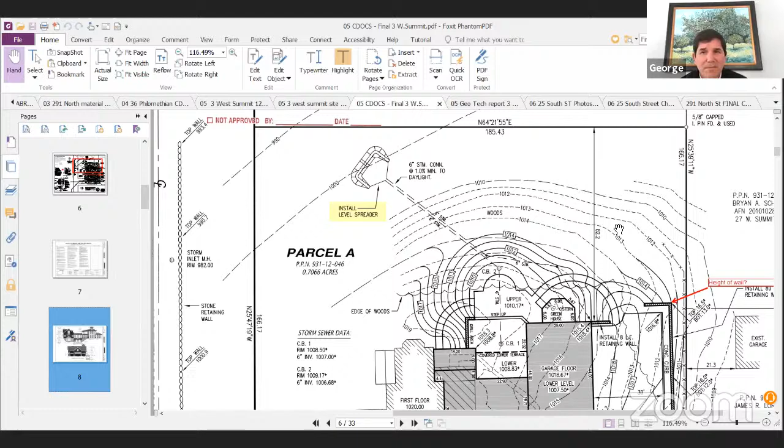Yeah, what George said, architectural details, of all the exterior details, there's quite a few of them. Okay, architectural details, restudy of the square and picture windows on the barn, landscape plan and retaining wall with engineer's approval. Might mention geotech too, that's all part of it. Engineer approval and geotech. Yes, all subject to that. Stone and mortar materials and design.

Okay Joan, I'll say it again. So, motion for final approval, subject to submittal of architectural details including stone and mortar materials and design on the connector, and restudy of the square and picture windows on the barn, resubmittal of the landscape plan and retaining wall with engineer approval and geotech. Got it.

Anything else from the board that you want to add? I second that motion. Got everything, Joan? Yes, thank you. Motion by Naylor, second by King. Childs, yes. King, yes. Naylor, yes.

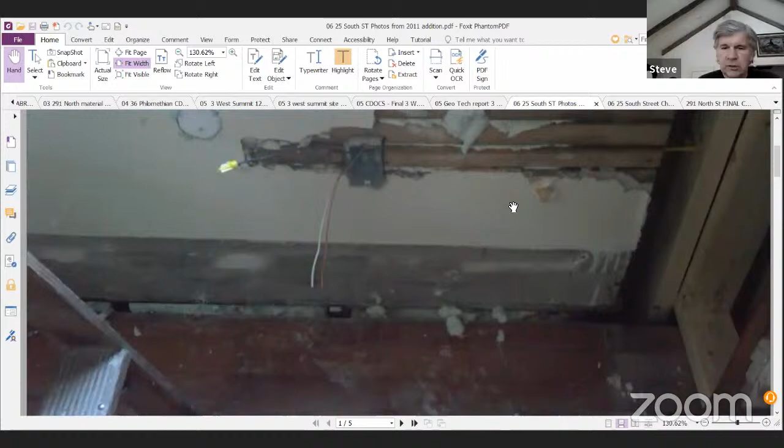Project on a slightly different scale, 25 South Street. We had a discussion and then a post-discussion with the owner at the last meeting. Mr. Kepf has had a meeting, which maybe he should explain, with the owner, and I guess I was enlightened to some things. Would you share that, Phil?

Is Phil still on? Phil got booted earlier. I thought he was going to log back in. I don't see him in attendance right now. Okay.

Phil was to have the meeting with the owner, who was a little concerned, a lot concerned, about our decision. They had a meeting together. Mr. Longnecker maybe can fill in some blanks, but Phil, after looking at it and seeing how the Hardy board was applied on the addition about 10 years ago...

I hesitate to use the term mitered because it's not really a mitered corner, it was a matched corner, a butt corner, and there were not going to be corner caps on the proposed re-siding of the front of the building.

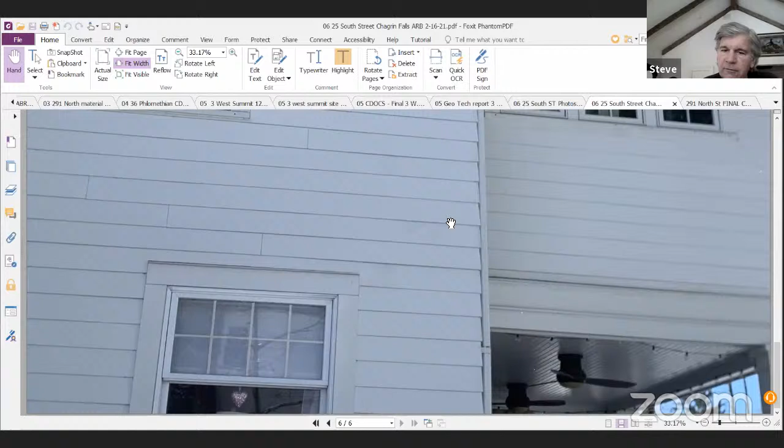I had concerns that the owner, quite frankly, was being promised too many things by the contractor in terms of insulation and never painting again and so on. But I think the owner now understands that there certainly is improvement maintaining the paint on the Hardy board, especially after you have adequate and complete vapor barrier and insulation, which is his goal.

Phil, I'm speaking for him now, sorry he's not here, was thinking that the Hardy board re-siding done in the way they discussed would be reasonable, and that the owner should be able to reap the benefits of new insulation and a vapor barrier.

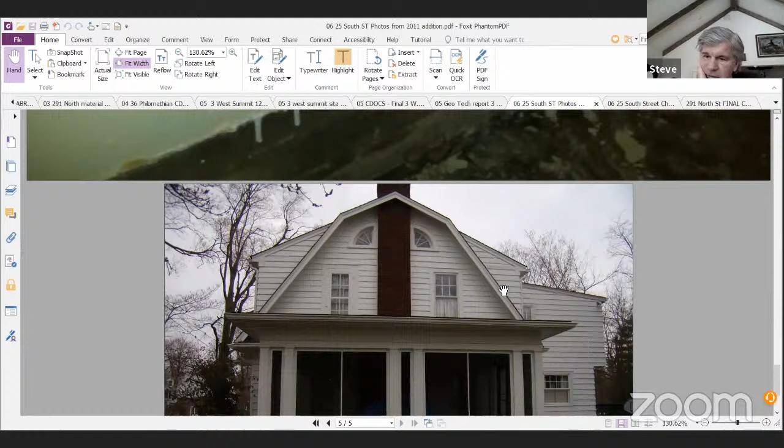Harry, did you talk to Phil about this? Am I covering that? I spoke with Phil about this as well. I got some pictures right here that I dug up from, I think it was 2011, when the addition was put on.

Voids in insulation they found when they did the addition. So I think once they pull this wood siding back, they're going to find some cold spots where there's no or very little insulation. But yeah, I did talk to Phil about this.

I spoke to the property owner. So about Phil, was satisfied that they could achieve the desired effect with the Hardy product. Yes, not having corner boards, having a butt joint cut in such a way that it appears mitered, something like that. And...

The existing house, I'm looking at that picture and wondering if it's not aluminum, right? I'm seeing these vertical lines as though it's aluminum. In this picture, no, George, it's not aluminum. Okay, it's wood.

I just had one comment on this. I think it's fine to put the Hardy board siding and all the trim and stuff, but it's really important - I've been on other boards where we've gotten burned on this - what you really need to do is require them to document all the details, take pictures of it, and do section cuts through the head, the jamb, the sill, the frieze, anywhere there's details, so that they get matched to what was existing. Because when you don't have documentation and a trail of what was there, they'll put it together and it'll be close, but maybe not quite what it should have been if we're trying to keep those historical details, especially the shadow lines.

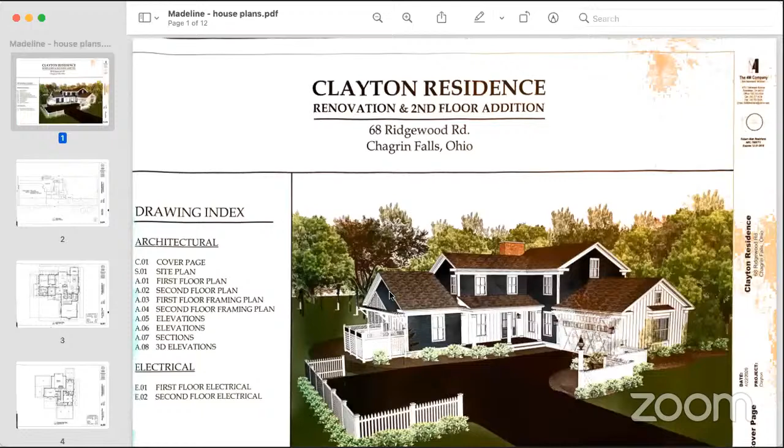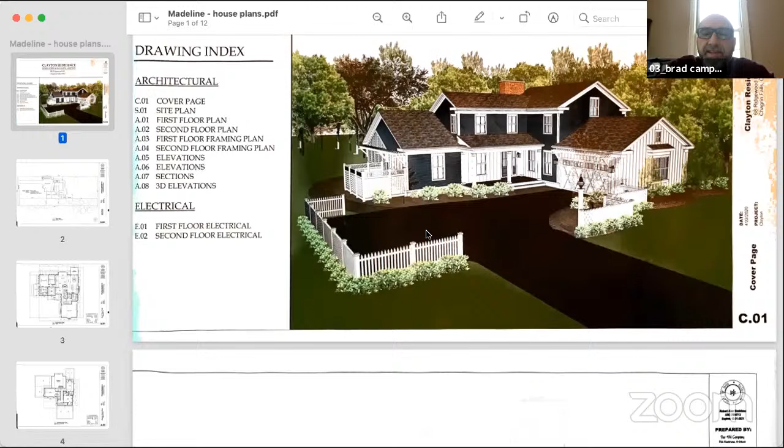It's launching. Perfect. So again, this is a one-story ranch now, and if you could see the second floor in the gray, that's essentially what we're going to keep, that same overall concept of plan. The foundation itself is not going to change.

We might bump out the kitchen, but that'd be for a later discussion. We just wanted to make sure, basically what I'm saying is, does this have historical significance? If anybody knows the answer to that, or what hurdles you think I might have, so I could be better prepared for our next meeting.

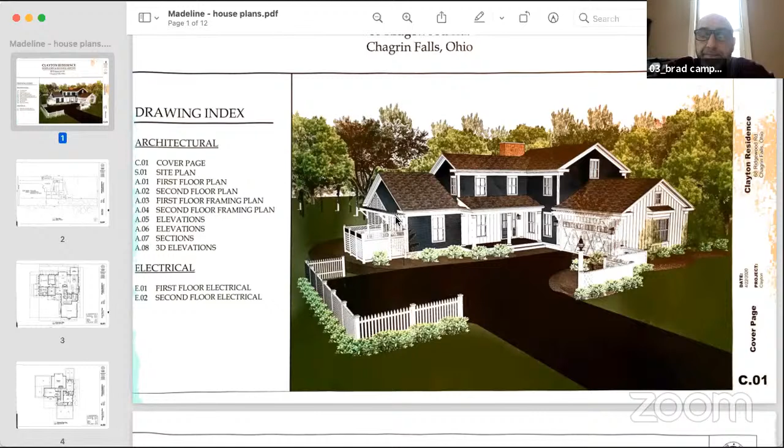This is the front elevation. This is the existing condition as you see it there. We're not going to probably get into that porch or outside garden at this point. And just a lot of remodeling the inside, as you look at the first floor, and then the second floor is what we would be adding to the overall plan.

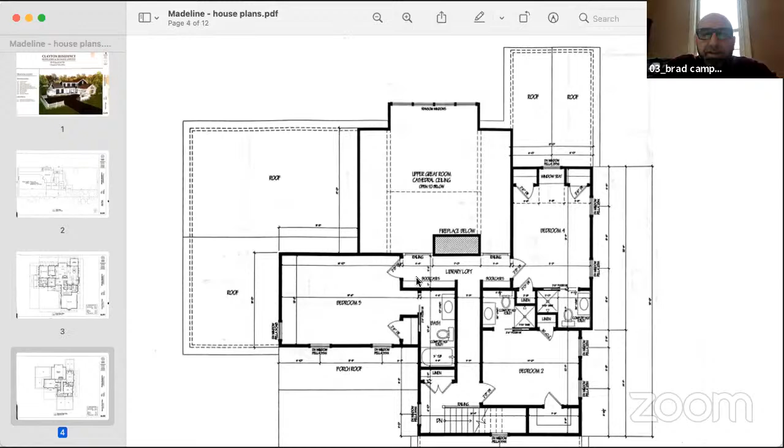So basically, you're going to take a ranch and turn it into a 2.5 story. That's it, we're taking a ranch and we're going to go up with it. I think the homeowner wants to stick with the classic kind of white siding, even the white windows. Kind of just try to go with a classic look to it.

And I don't know, does the board and batten fit the rest of the house? We don't think so either, we don't even plan on that, I think that's a great call. We plan on just matching the siding that's on the home already, which is horizontal siding. I think when they did this originally, they were trying to create like a farmhouse, and we don't want to get into that. We're thinking just more of a traditional look to it, and not try to create something that I don't think's there, frankly.

Farmhouse is an interesting term, quite the term lately. Yeah, I don't know where they're coming from. I watched a TV show that said they made a farmhouse out of 3 shipping containers, you know, the corrugated overseas containers, and they called it a farmhouse. So I don't know what a farmhouse is. Yeah, we're not trying to...

Put lipstick on a pig, if you will, and try to create that. We want to kind of maintain the same roof lines that you see, if you look at the garage, or if you look at that left side, that's the roof line that's existing, right? So we're not trying to recreate anything, we just want to put that second floor on there, and then we're going to redo the whole inside of the house. The neighbors on that street have beautiful homes, and we're hoping that at the end of the day, this thing fits right in there.

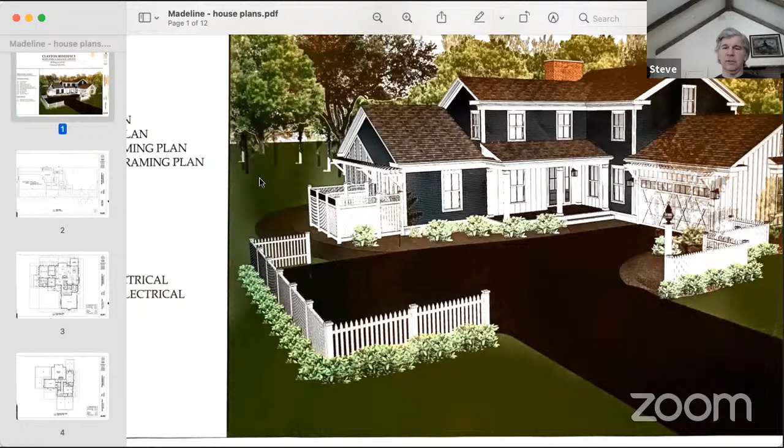Okay, my suggestion is this: when they figure out what their ideas are, and you put them together for them, bring them in and we'll take a look at it. Okay, but just from a high level, I just want to make sure I'm not coming to you guys with a log cabin where you're like, there's no way in heck we're even going to look at this, Brad. That was it, I appreciate you guys taking the time. Very good, thank you everybody, we look forward to seeing your plans. Okay, bye, bye, thank you.

Anybody else, Christie? You know, Jim Tressel had a saying that I've always appreciated: potential means you just haven't done it yet.